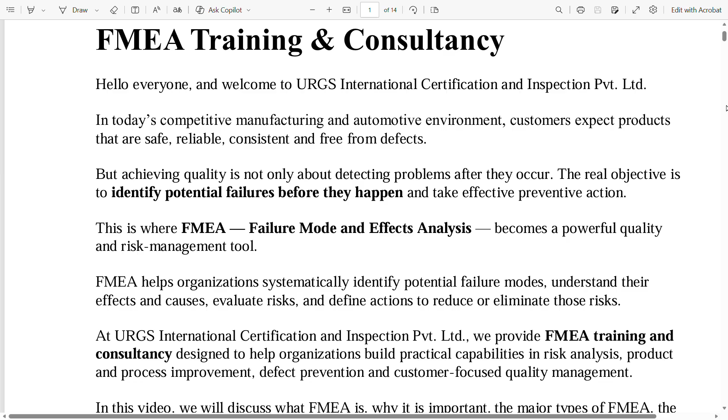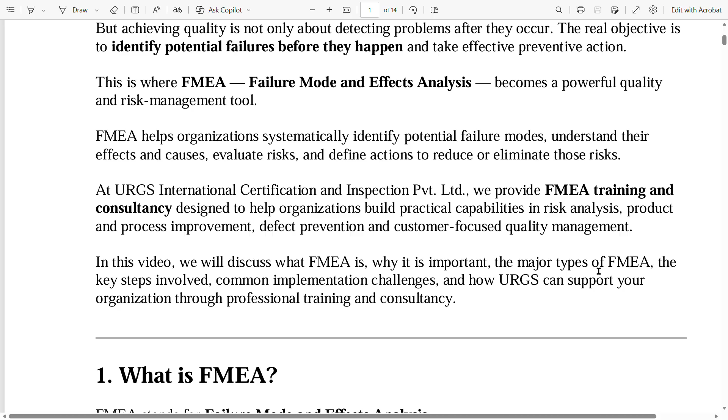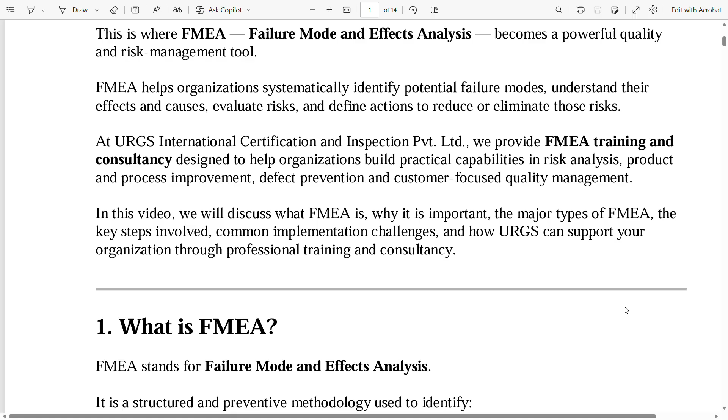This is where FMEA, failure mode and effects analysis, becomes a powerful quality and risk management tool. FMEA helps organizations systematically identify potential failure modes, understand their effects and causes, evaluate risks, and define actions to reduce or eliminate those risks. At URGS International Certification and Inspection Private Limited, we provide FMEA training and consultancy designed to help organizations build practical capabilities in risk analysis, product and process improvement, defect prevention, and customer-focused quality management. In this video, we will discuss what FMEA is, why is it important, the major types of FMEA, the key steps involved, common implementation challenges, and how URGS can support your organization through professional training and consultancy.

First, what is FMEA? FMEA stands for Failure Mode and Effects Analysis. It is a structured and preventive methodology used to identify what can go wrong, how can it go wrong, why can it go wrong, what will happen if it goes wrong, how effectively can the failure be prevented or detected, what actions should be taken to reduce the risk.

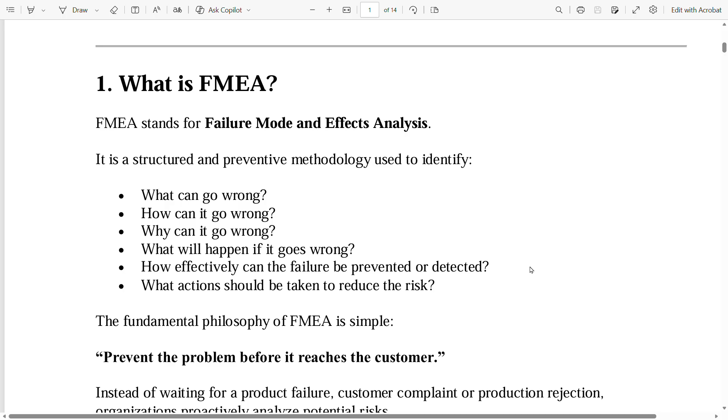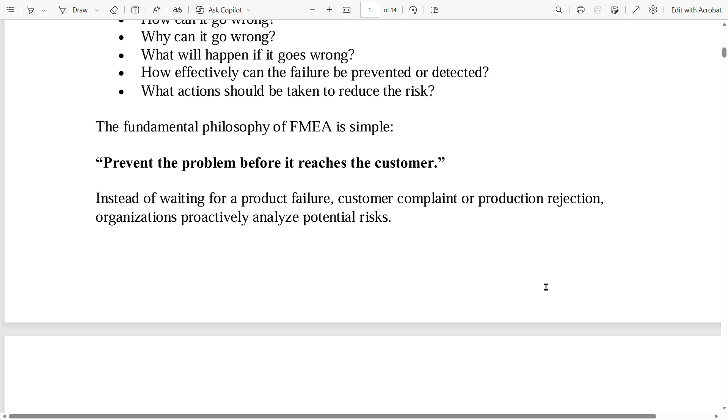The fundamental philosophy of FMEA is simple: prevent the problem before it reaches the customer. Instead of waiting for a product failure, customer complaint, or production rejection, organizations proactively analyze potential risks. FMEA can be applied during product design, manufacturing process development, process improvement, equipment development, and many other activities.

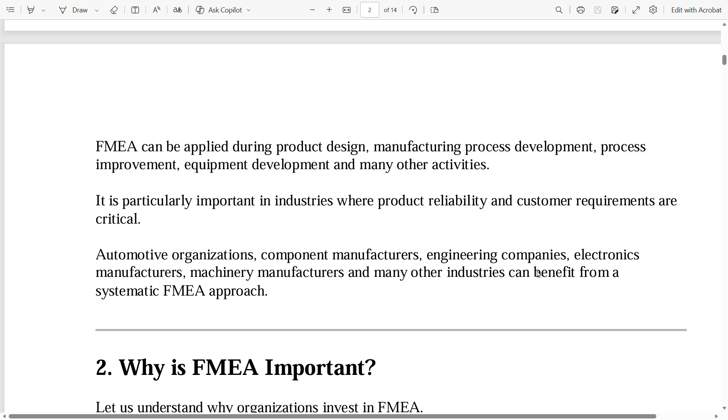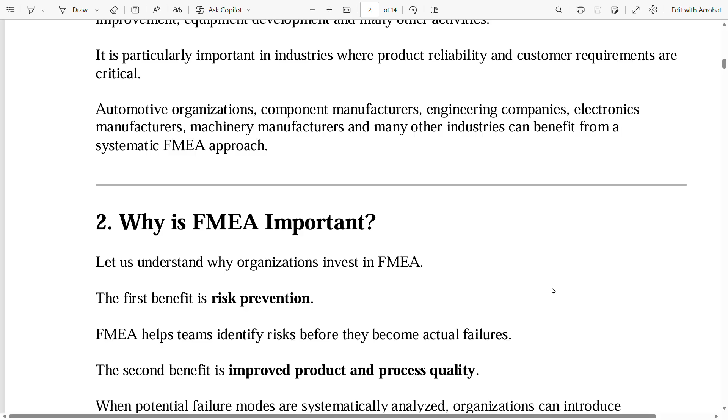It is particularly important in industries where product reliability and customer requirements are critical. Automotive organizations, component manufacturers, engineering companies, electronics manufacturers, machinery manufacturers, and many other industries can benefit from a systematic FMEA approach. Now, next is, why is FMEA important?

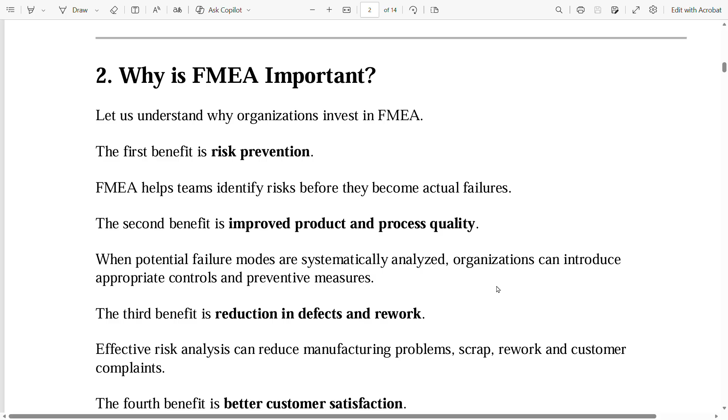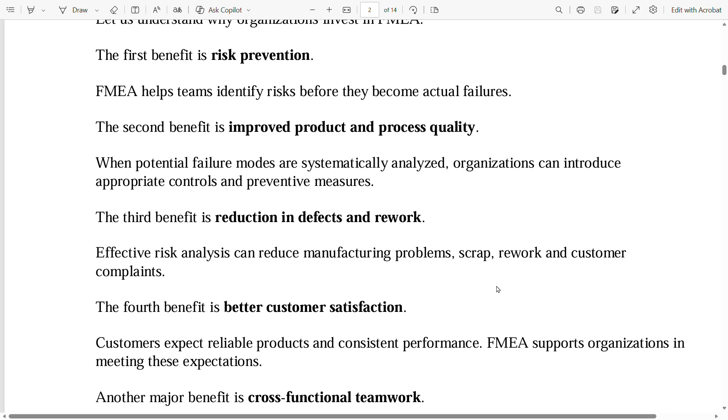Let's understand why organizations invest in FMEA. The first benefit is risk prevention. FMEA helps teams identify risk before they become actual failures. The second benefit is improved product and process quality. When potential failure modes are systematically analyzed, organizations can introduce appropriate controls and preventive measures. The third benefit is reduction in defects and rework. Effective risk analysis can reduce manufacturing problems, scrap, rework, and customer complaints.

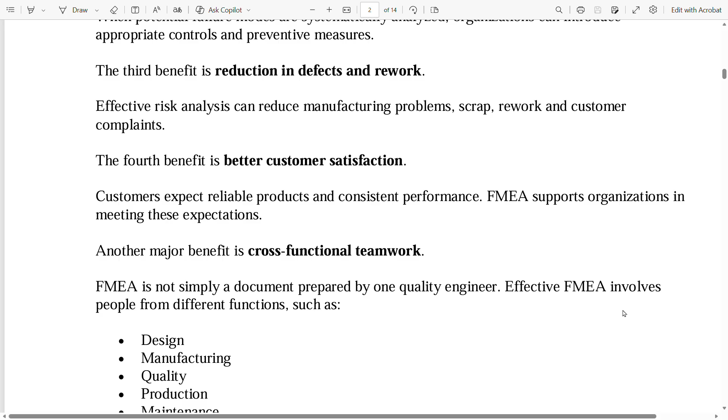The fourth benefit is better customer satisfaction. Customers expect reliable products and consistent performance. FMEA supports organizations in meeting these expectations.

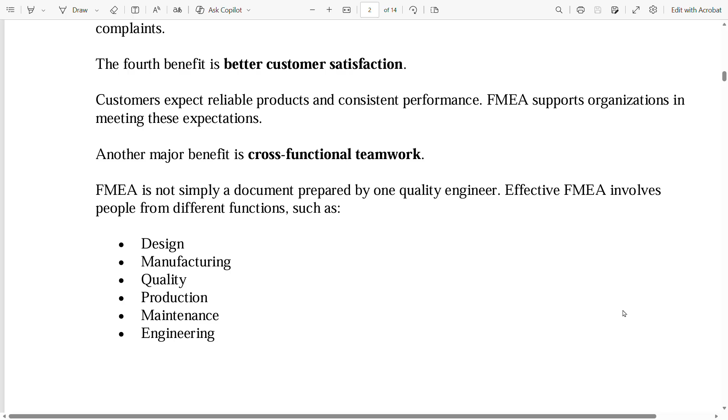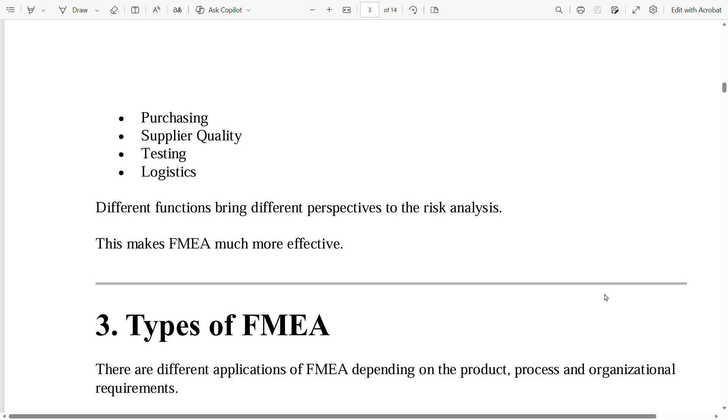Another major benefit is cross-functional teamwork. FMEA is not simply a document prepared by one quality engineer. Effective FMEA involves people from different functions such as design, manufacturing, quality, production, maintenance, engineering, purchasing, supplier quality, testing, logistics. Different functions bring different perspectives to the risk analysis. This makes FMEA much more effective.

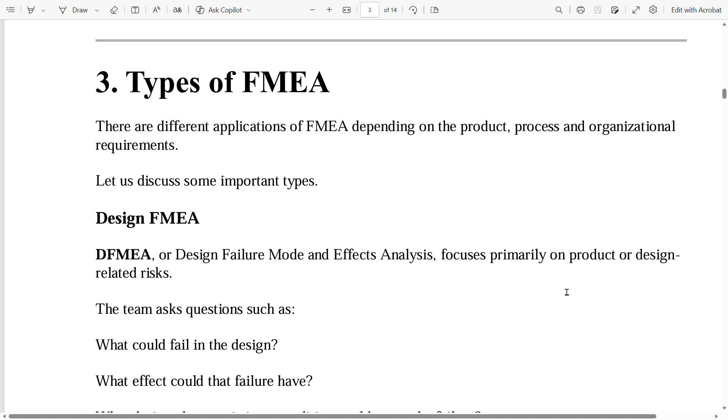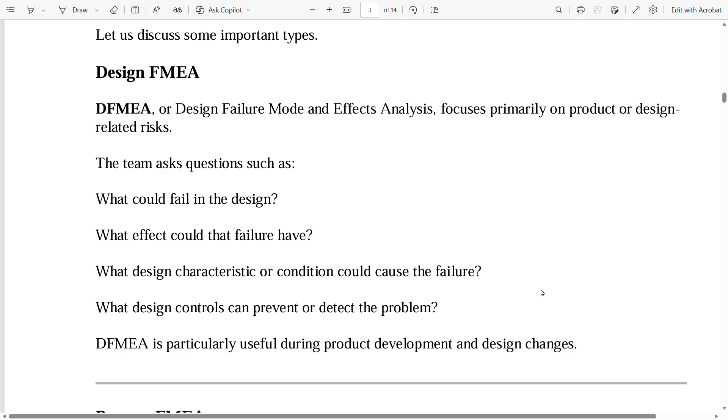Then, types of FMEA. There are different applications of FMEA depending on the product, process, and organizational requirements. Let's discuss some important types. Design FMEA, or DFMEA, focuses primarily on product or design related risks. The team asks questions such as: what could fail in the design, what effect could that failure have, what design characteristics or condition could cause the failure, what design controls can prevent or detect the problem. DFMEA is particularly useful during product development and design changes.

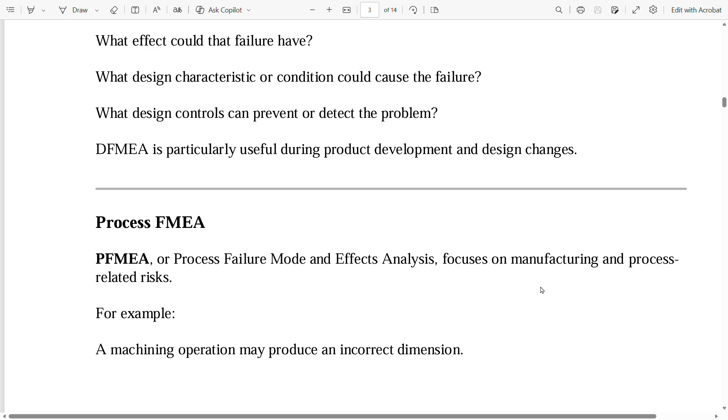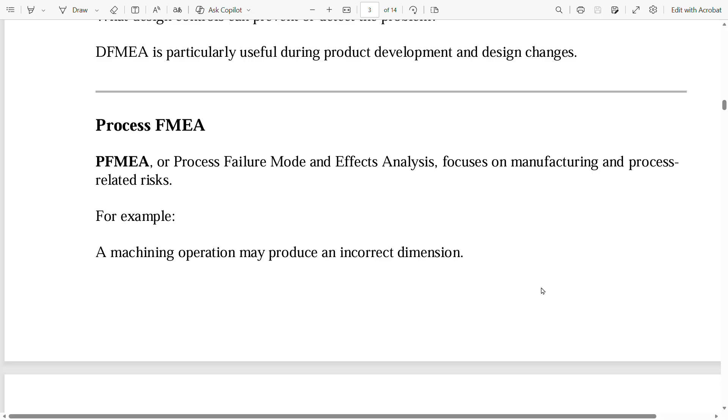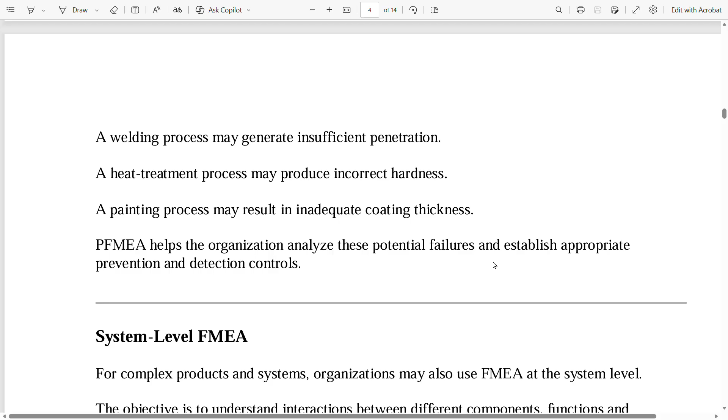Process FMEA, or PFMEA, focuses on manufacturing and process related risks. For example, a machining operation may produce an incorrect dimension. A welding process may generate insufficient penetration. A heat treatment process may produce incorrect hardness. A painting process may result in inadequate coating thickness. PFMEA helps the organization analyze these potential failures and establish appropriate prevention and detection controls.

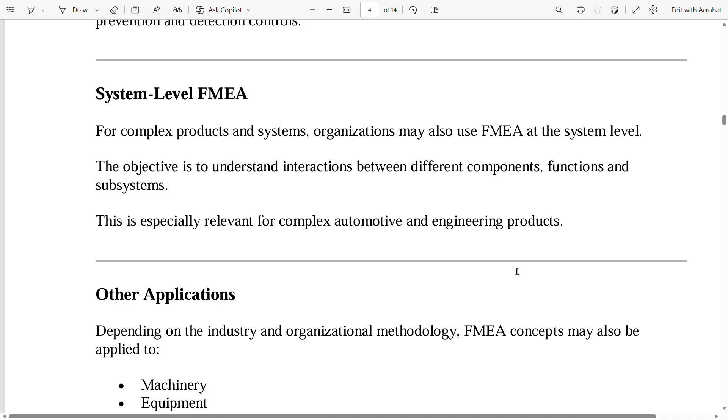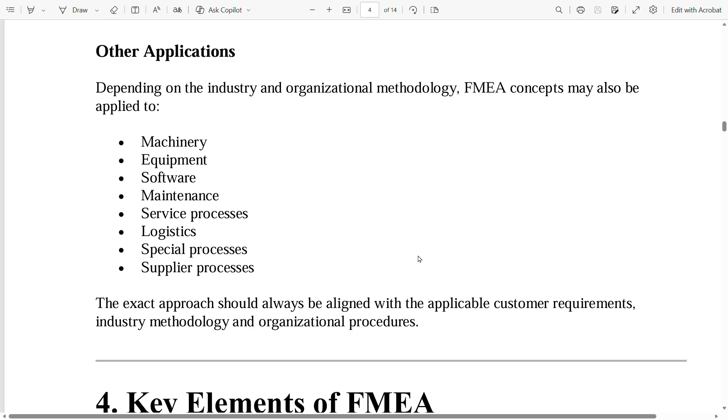System level FMEA: for complex products and systems, organizations may also use FMEA at the system level. The objective is to understand interactions between different components, functions, and subsystems. This is especially relevant for complex automotive and engineering products. Other applications, depending on the industry and organizational methodology, FMEA concepts may also be applied to machinery, equipment, software, maintenance, service processes, logistics, special processes, supplier processes. The exact approach should always be aligned with the applicable customer requirements, industry methodology, and organizational procedures.

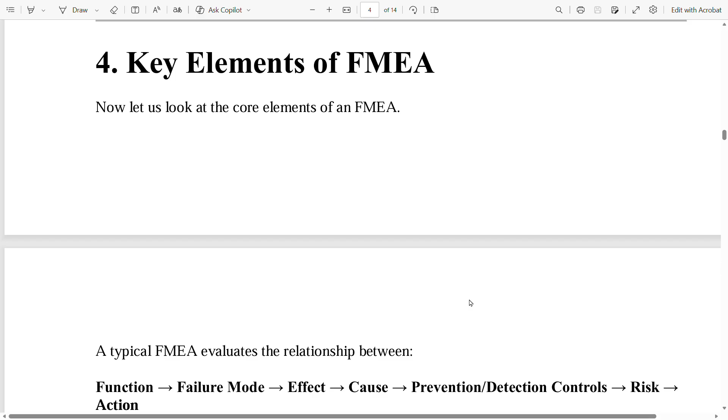Now, key elements of FMEA. Let us look at the core elements of an FMEA. A typical FMEA evaluates the relationship between function to failure mode, to effect, to cause, to prevention, detection controls, to risk, to action.

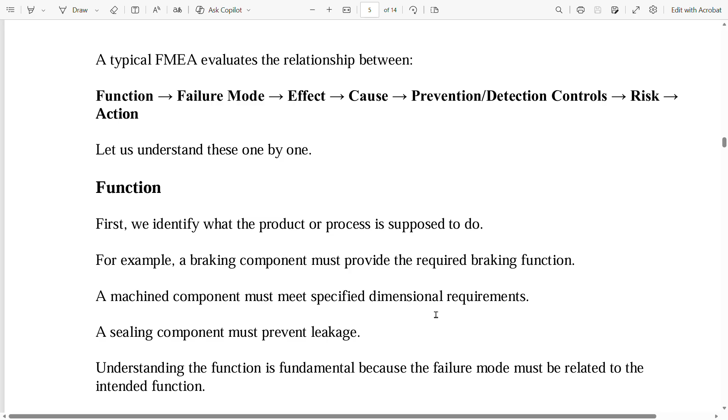Let's understand these one by one. Function: first, we identify what the product or process is supposed to do.

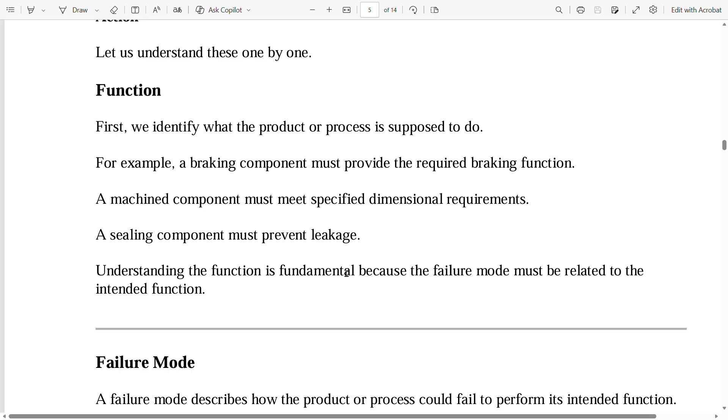For example, a braking component must provide the required braking function. A machined component must meet specified dimensional requirements. A sealing component must prevent leakage. Understanding the function is fundamental because the failure mode must be related to the intended function.

Failure mode: a failure mode describes how the product or process could fail to perform its intended function. Examples include incorrect dimension, leakage, crack, insufficient strength, excessive wear, poor weld penetration, incorrect assembly, surface damage. The failure mode should be clearly defined.

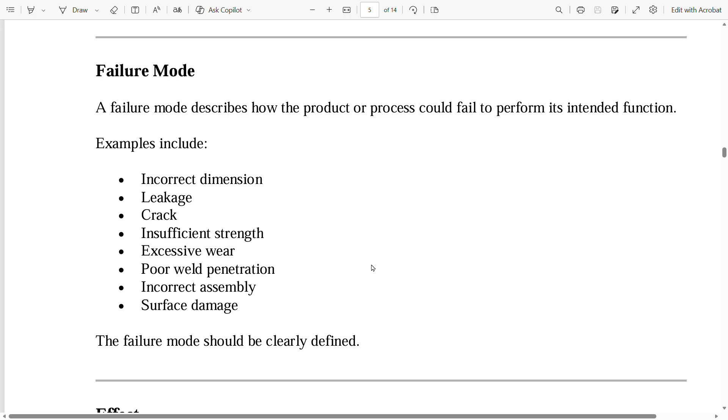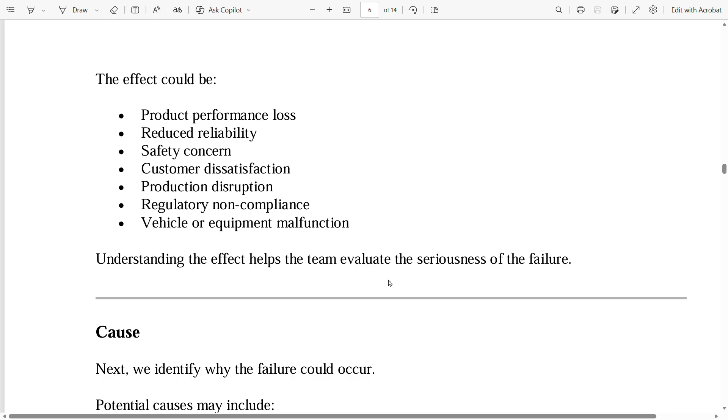Effect: the next question is what happens if this failure occurs? The effect could be product performance loss, reduced reliability, safety concern, customer dissatisfaction, production disruption, regulatory non-compliance, vehicle or equipment malfunction. Understanding the effect helps the team evaluate the seriousness of the failure.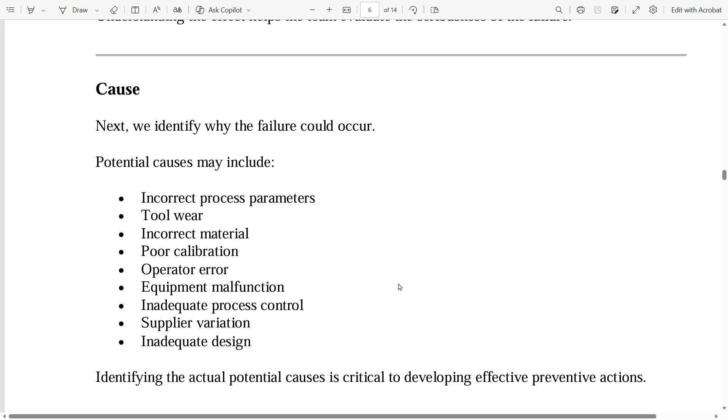Now cause: next we identify why the failure could occur. Potential causes may include incorrect process parameters, tool wear, incorrect material, poor calibration, operator error, equipment malfunction, inadequate process control, supplier variation, inadequate design. Identifying the actual potential causes is critical to developing effective preventive actions.

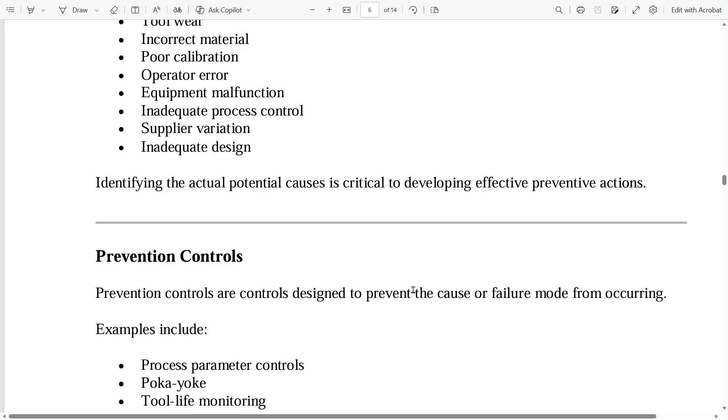Prevention controls: prevention controls are controls designed to prevent the cause or failure mode from occurring. Examples include process parameter controls, poka-yoke, tool life monitoring, design optimization, automated controls, standardized work instructions.

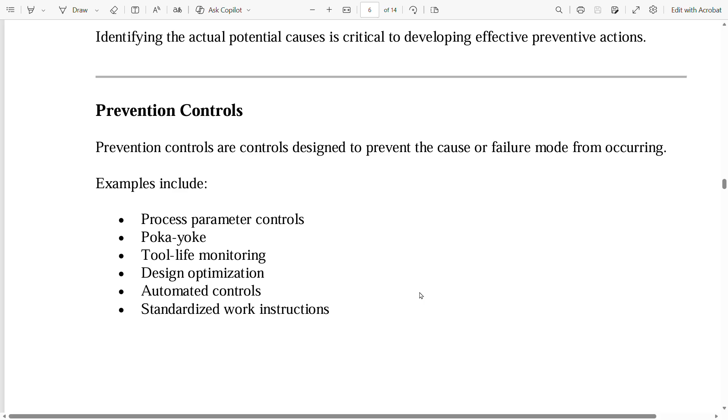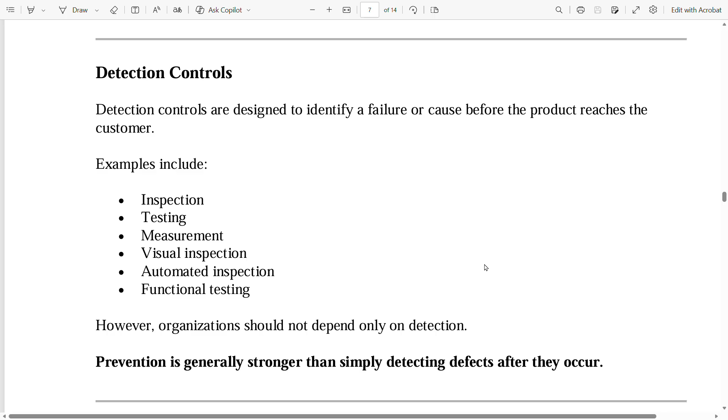Detection controls: detection controls are designed to identify a failure or cause before the product reaches the customer. Examples include inspection, testing, measurement, visual inspection, automated inspection, functional testing. However, organizations should not depend only on detection. Prevention is generally stronger than simple detecting defects after they occur.

The next is risk evaluation. Fifth, one of the important aspects of FMEA is risk evaluation. Traditionally, organizations have used ratings such as severity, occurrence, detection. These ratings help teams prioritize risks.

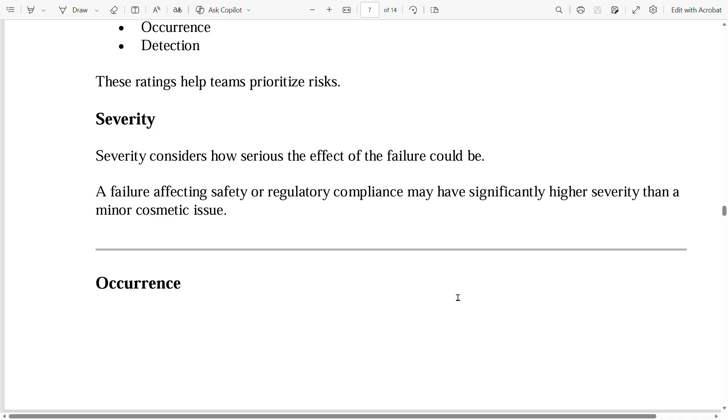Severity considers how serious the effect of the failure could be. A failure affecting safety or regulatory compliance may have significantly higher severity than a minor cosmetic issue.

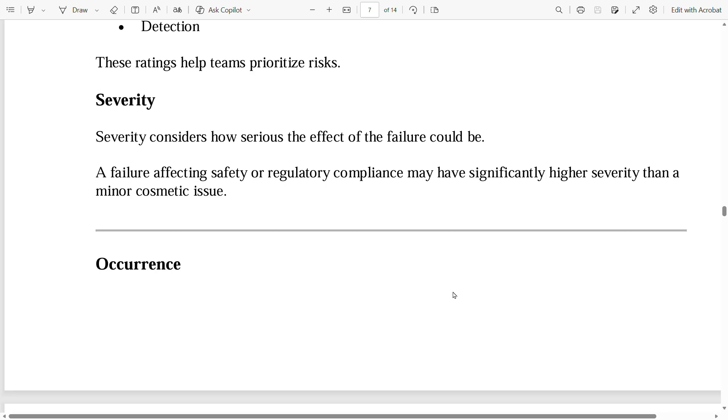Occurrence: occurrence considers how frequently the cause or failure is expected to occur. Historical data, process capability, field data, warranty information, and engineering knowledge can help evaluate occurrence.

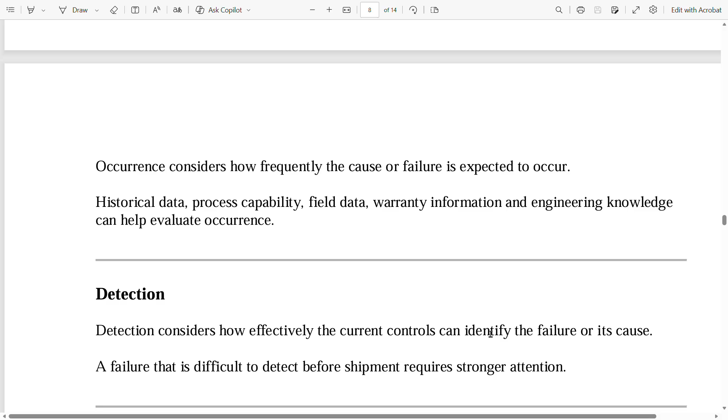Detection: detection considers how effectively the current controls can identify the failure or its cause. A failure that is difficult to detect before shipment requires strong attention.

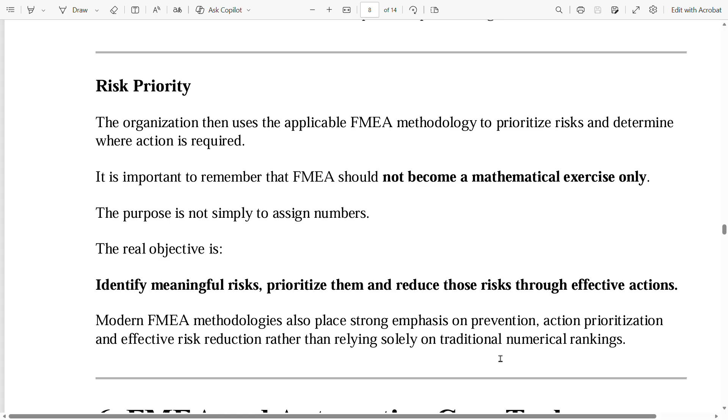Risk priority: the organization then uses the applicable FMEA methodology to prioritize risks and determine where action is required. It is important to remember that FMEA should not become a mathematical exercise only. The purpose is not simply to assign numbers. The real objective is to identify meaningful risks, prioritize them, and reduce those risks through effective actions.

Modern FMEA methodology also places strong emphasis on prevention, action prioritization, and effective risk reduction rather than relying solely on traditional numerical rankings.

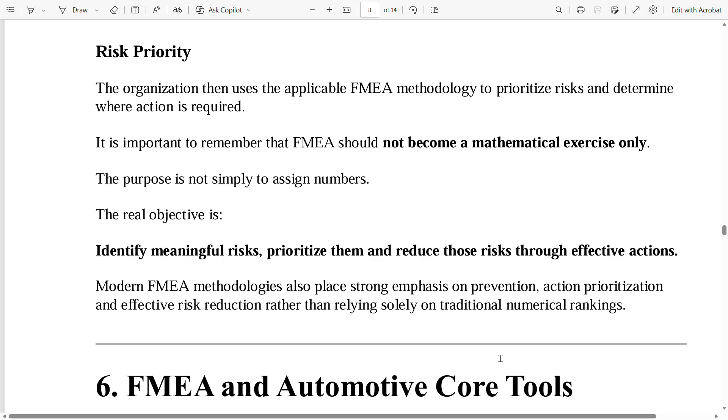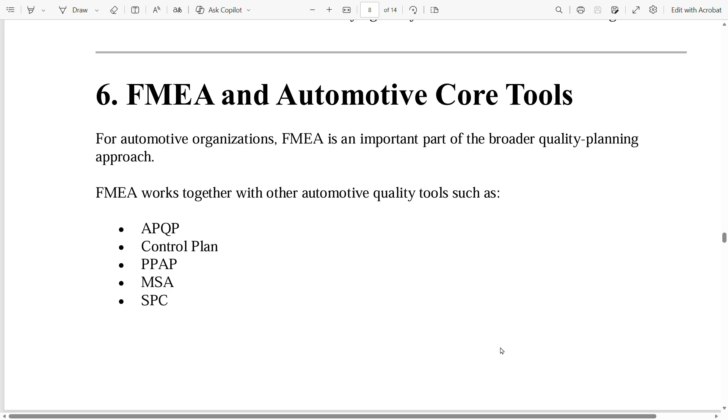The next is FMEA and automotive core tools. For automotive organizations, FMEA is an important part of the broader quality planning approach. FMEA works together with other automotive quality tools such as APQP, Control Plan, PPAP, MSA, SPC.

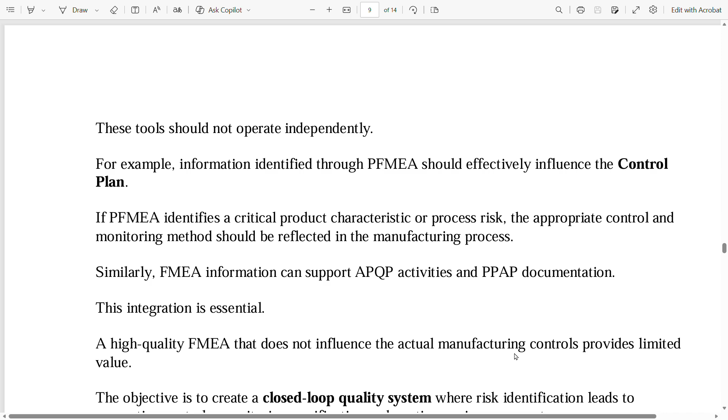These tools should not operate independently. For example, information identified through PFMEA should effectively influence the control plan. If a PFMEA identifies a critical product characteristic or process risk, the appropriate control and monitoring method should be reflected in the manufacturing process. Similarly, FMEA information can support APQP activities and PPAP documentation.

This integration is essential. A high quality FMEA that does not influence the actual manufacturing controls provides limited value. The objective is to create a closed loop quality system where risk identification leads to preventive controls, monitoring, verification, and continuous improvement.

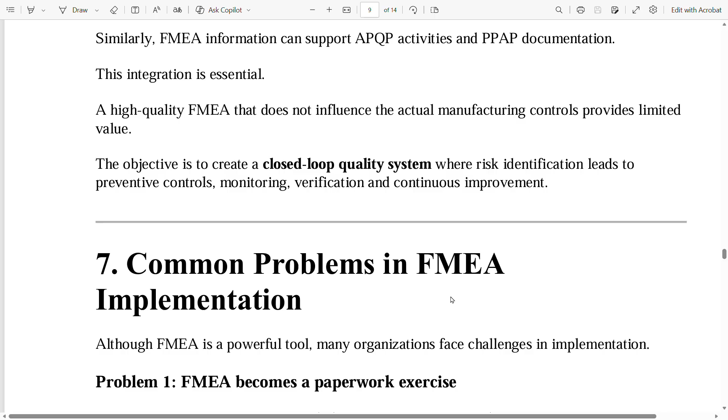Then, common problems in FMEA implementation. Although FMEA is a powerful tool, many organizations face challenges in implementation. Problem 1: FMEA becomes a paperwork exercise.

Sometimes teams prepare FMEA only because a customer or auditor requires it. This results in generic documents with limited practical value. FMEA should be treated as an engineering and quality improvement activity, not merely documentation.

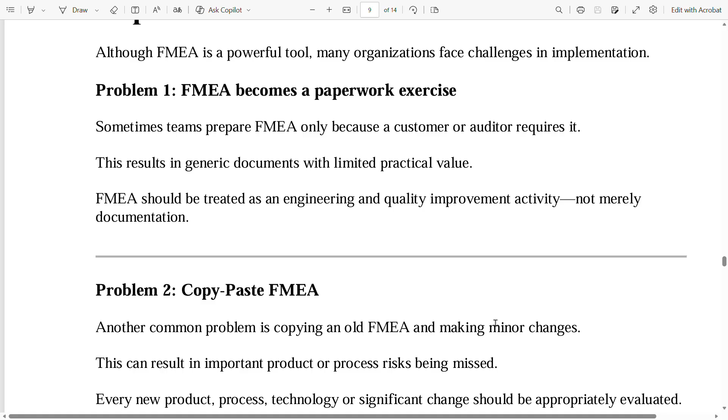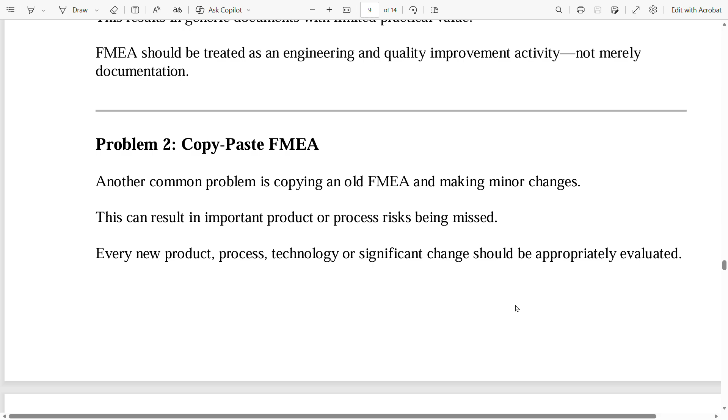Problem 2: copy-paste FMEA. Another common problem is copying an old FMEA and making minor changes. This can result in important product or process risk being missed. Every new product, process, technology, or significant change should be appropriately evaluated.

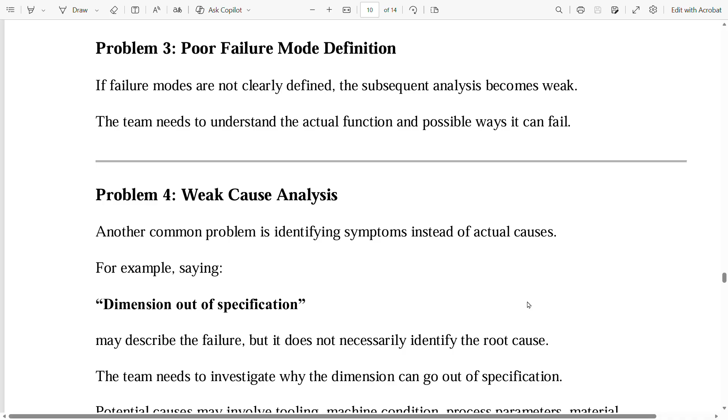Now problem 3: poor failure mode definition. If failure modes are not clearly defined, the subsequent analysis becomes weak. The team needs to understand the actual function and possible ways it can fail.

Now problem 4, weak cause analysis. Another common problem is identifying symptoms instead of actual causes. For example, saying dimension out of specification may describe the failure, but it does not necessarily identify the root cause. The team needs to investigate why the dimension can go out of specification. Potential causes may involve tooling, machine condition, process parameters, material, measurement systems, or other factors.

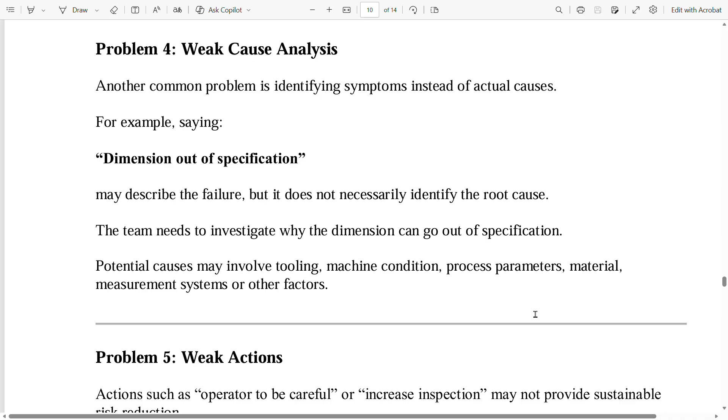Problem 5, weak actions. Actions such as operator be careful or increase inspection may not provide sustainable risk reduction. Effective actions should address the underlying risk. Where practical, organizations should prioritize robust preventive controls, mistake proofing, process optimization, and engineering solutions.

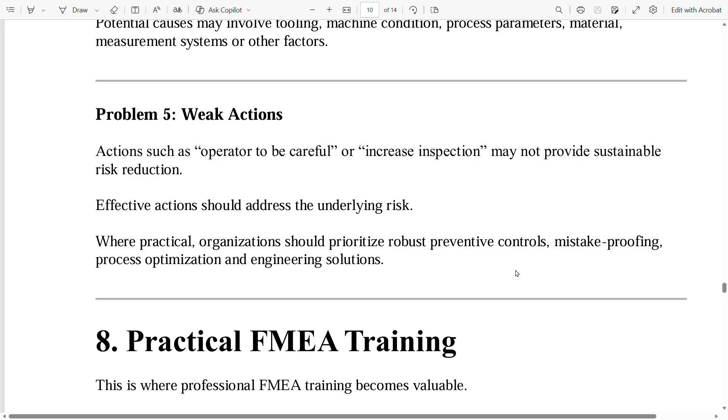Next is practical FMEA training. This is where professional FMEA training becomes valuable. At URGS International Certification and Inspection Private Limited, our FMEA training is designed with a practical and industry-oriented approach. The objective is not simply to explain terminology.

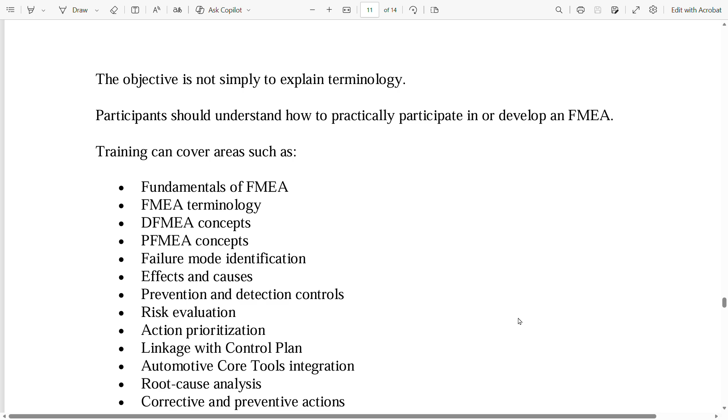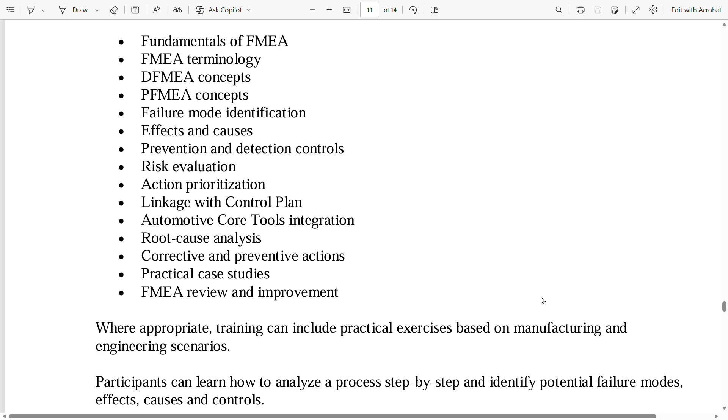Participants should understand how to practically participate in or develop an FMEA. Training can cover areas such as fundamentals of FMEA, FMEA terminology, DFMEA concepts, PFMEA concepts, failure mode identification, effects and causes, prevention and detection controls, risk evaluation, action prioritization, linkage with control plan, automotive core tools integration, root cause analysis, corrective and preventive actions, practical case studies, FMEA review and improvement.

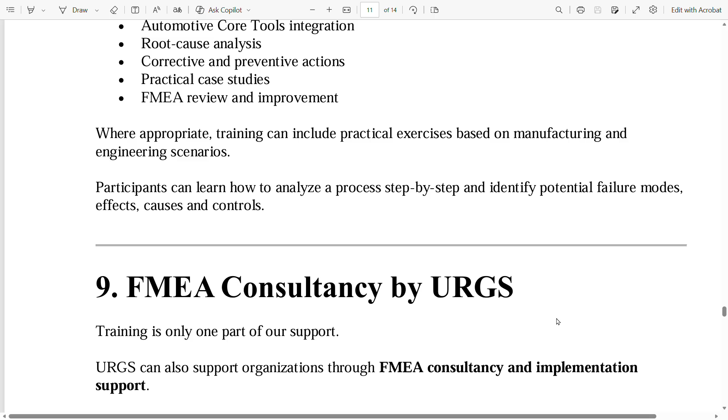Where appropriate, training can include practical exercises based on manufacturing and engineering scenarios. Participants can learn how to analyze a process step by step, identifying potential failure modes, effects, causes, and controls.

Ninth, FMEA consultancy by URGS. Training is only one part of our support. URGS can also support organizations through FMEA consultancy and implementation support. Our support can include FMEA development and review. We can support organizations in developing or reviewing their DFMEA and PFMEA methodology, process risk analysis.

We can help teams systematically identify process risks and potential failure modes. FMEA improvement: existing FMEAs can be reviewed for gaps, inconsistencies, and opportunities for improvement. Control plan linkage: we can support organizations in strengthening the relationship between PFMEA and control plan. Root cause analysis: our technical support can help organizations investigate recurring failures and identify appropriate corrective actions.

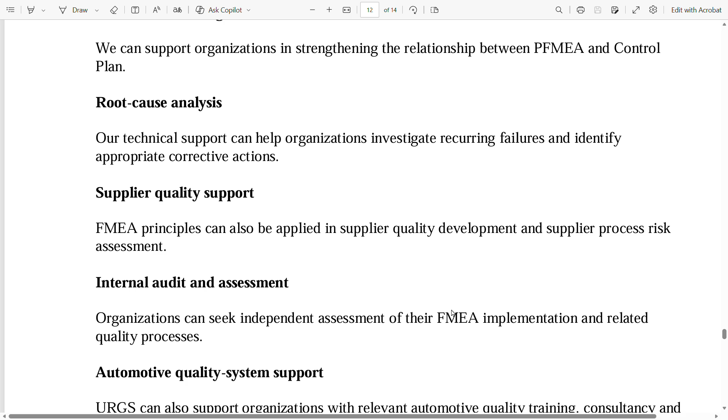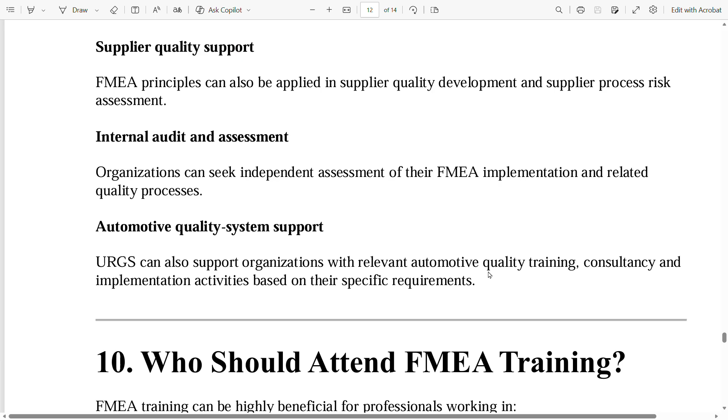Supplier quality support. FMEA principles can also be applied in supplier quality development and supplier process risk assessment. Internal audit and assessment: organizations can seek independent assessment of their FMEA implementation and related quality processes. Automotive quality system support: URGS can also support organizations with relevant automotive quality training, consultancy, and implementation activities based on their specific requirements. Now, who should attend?

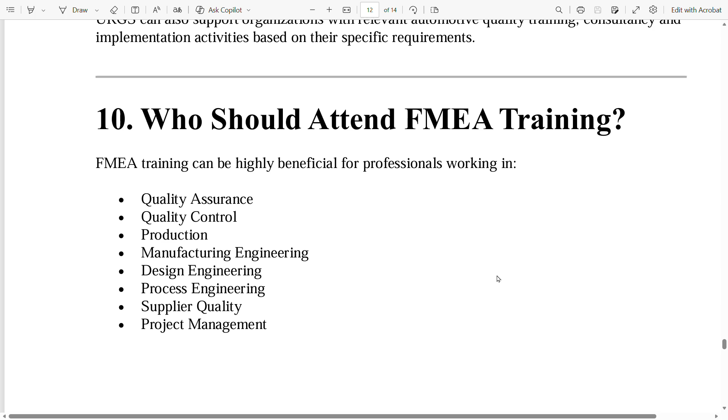FMEA training can be highly beneficial for professionals working in quality assurance, quality control, production, manufacturing engineering, design engineering, process engineering, supplier quality, project management, maintenance, product development, testing, and inspection. It is also valuable for internal auditors, quality professionals, manufacturing professionals, and managers who are responsible for risk reduction and continuous improvement.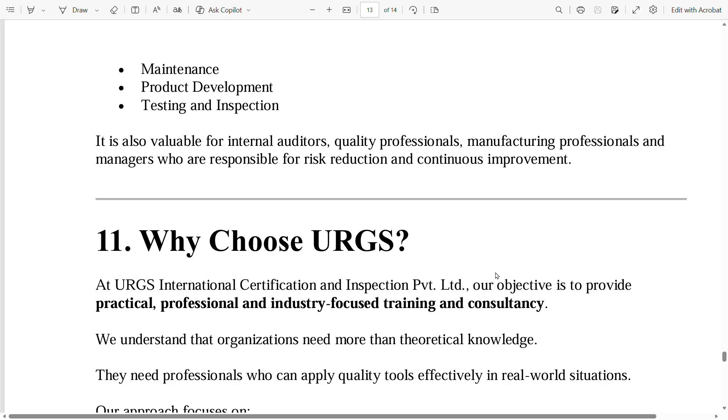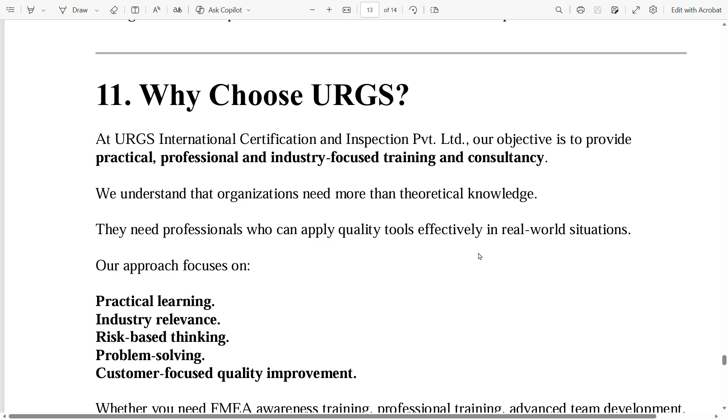Now, why choose URGS International? At URGS International Certification and Inspection Private Limited, our objective is to provide practical, professional, and industry-focused training and consultancy. We understand that organizations need more than theoretical knowledge. They need professionals who can apply quality tools effectively in real-world situations.

Our approach focuses on practical learning, industry relevance, risk-based thinking, problem solving, and customer-focused quality improvement. Whether you need FMEA awareness training, professional training, advanced team development, FMEA review, implementation support, or related automotive quality consultancy, URGS can support your organization based on your requirements.

At last, closing: FMEA is much more than a quality document. It is a preventive risk management methodology that helps organizations identify potential failures, reduce risks, strengthen processes, and improve product reliability. Properly implemented, FMEA can contribute to better quality, fewer defects, lower rework and scrap, improved customer satisfaction, stronger process control, and better risk prevention.

If your organization is looking for FMEA training, FMEA consultancy, DFMEA/PFMEA support, automotive core tools training, process risk assessment, or quality improvement support, URGS International Certification and Inspection Private Limited is ready to assist. For training and consultancy inquiries, email us at info@urgsiso.com.